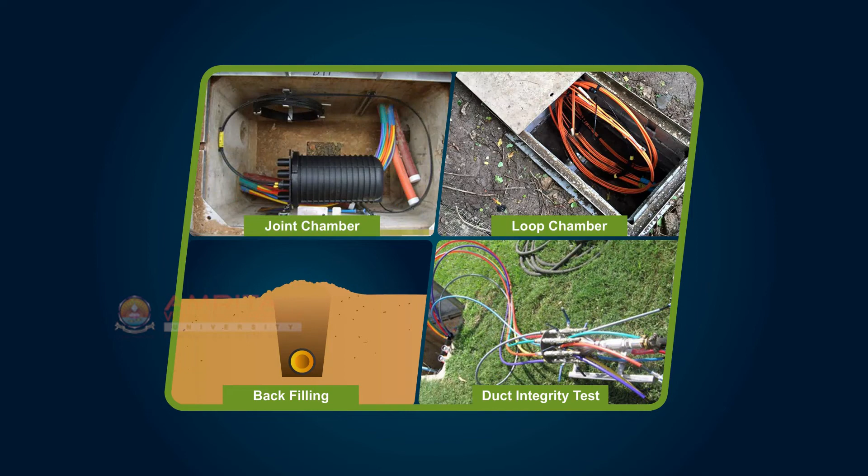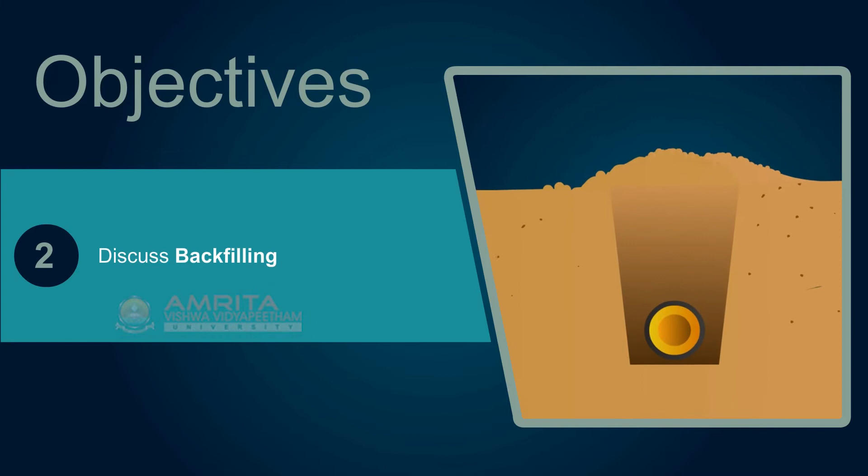Joint chamber, backfilling, and duct integrity test. Installing joint and loop chamber, backfilling, and conducting duct integrity test are the steps involved in installation after laying ducts. In this session, we will discuss these steps in detail. At the end of the session, you will be able to explain about joint chamber and loop chamber, discuss backfilling, and explain about duct integrity test.

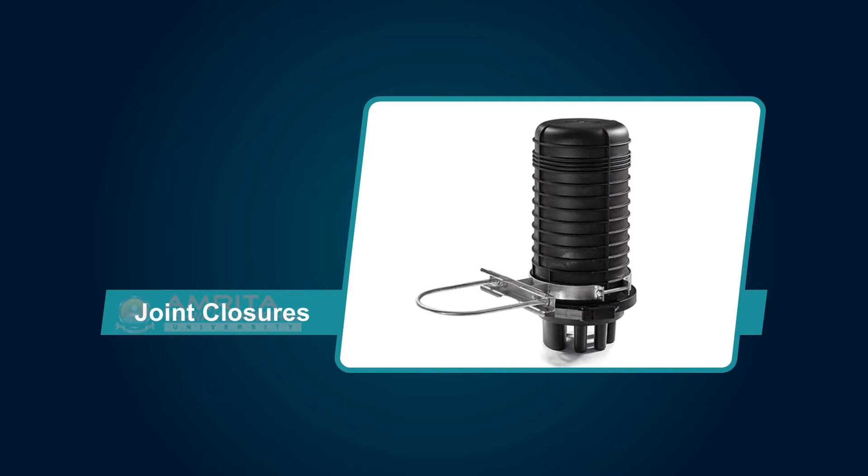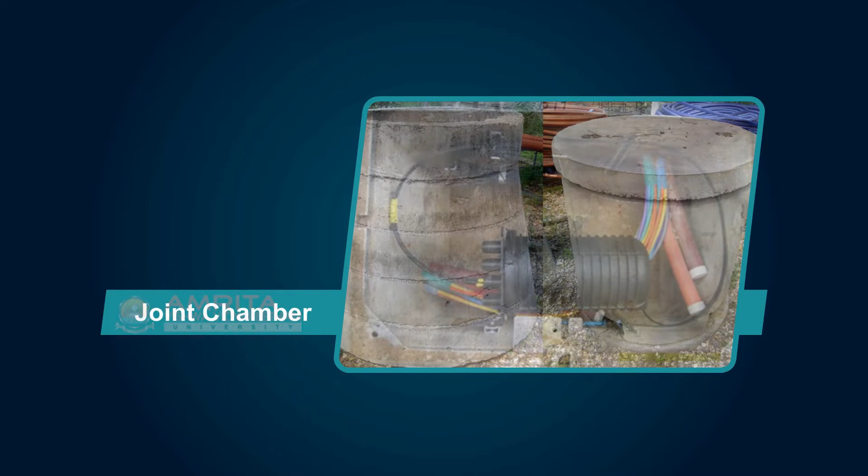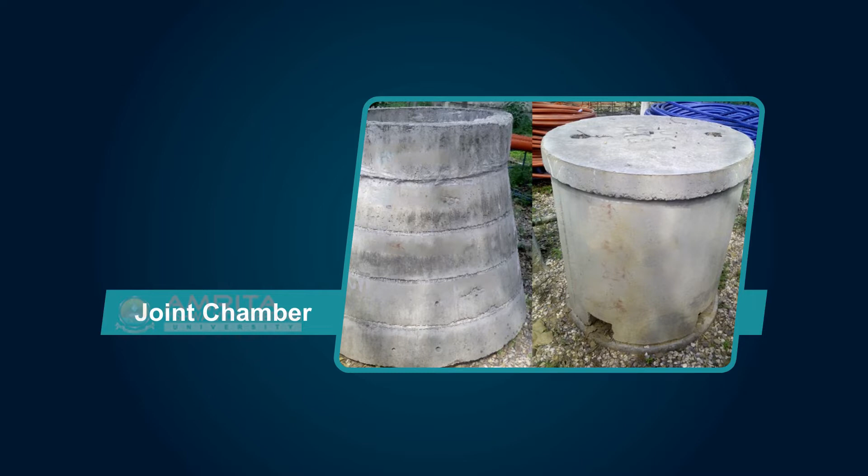Joint closures. As the fiber joints are delicate, they are kept inside a plastic enclosure called joint closure in order to protect the fiber and also to give strength. Joint chamber is the underground chamber in which the joint closure with the splice joint of optical fiber cables is safely kept. They are protected by a chamber cover. Joint chamber is also called manhole or splice chamber.

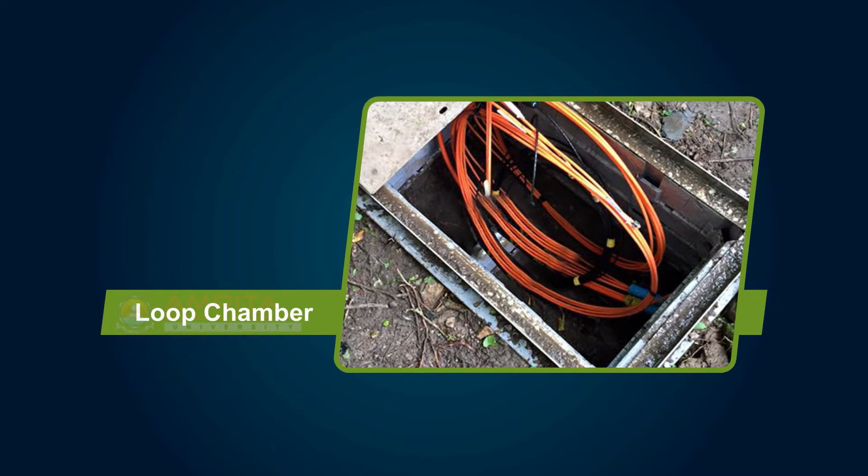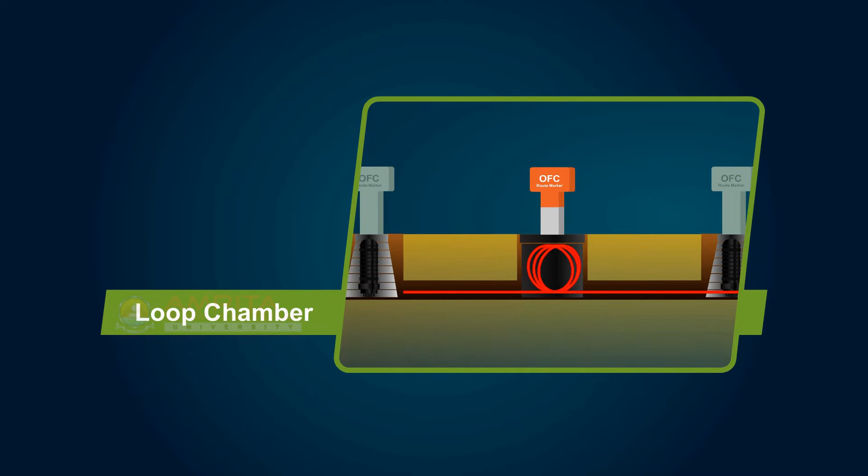Loop chamber. Loop chamber is the chamber in which loops of additional optical fiber cable are kept en route for any servicing or future usage. Loop chamber is also called handhole or pull-through chamber. Joint chambers are placed in intervals as per planning. One loop chamber is kept in between every two joint chambers. The duct entry hole should be sealed in the chamber to prevent entry of water.

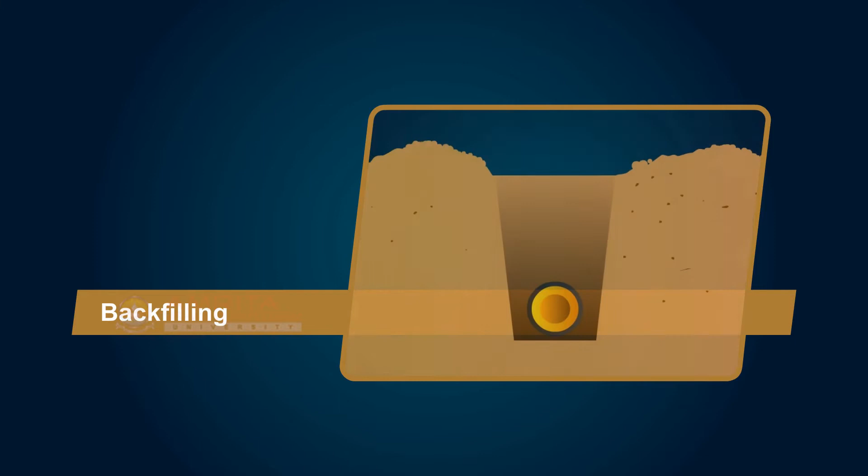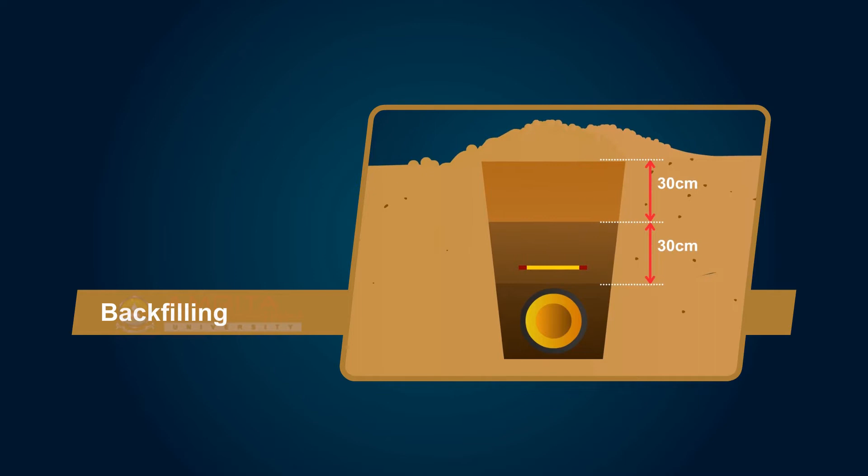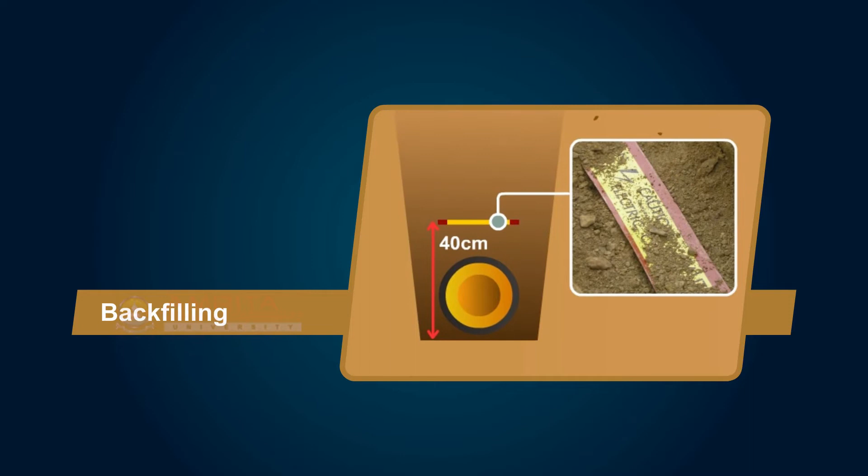Backfilling. Backfilling is the process of filling the trench back with the excavated soil after ducting. It is important that after filling the trench, some more mud is put on top of the trench in a heap as shown here. Filling this heap soil on top is known as crowning. The backfill material shall be placed in the trench in layers of approximately 300 mm with each layer compacted before the next is added. After compacting, the warning tape shall be laid along the whole length of the trench approximately 40 cm to 60 cm below the ground level.

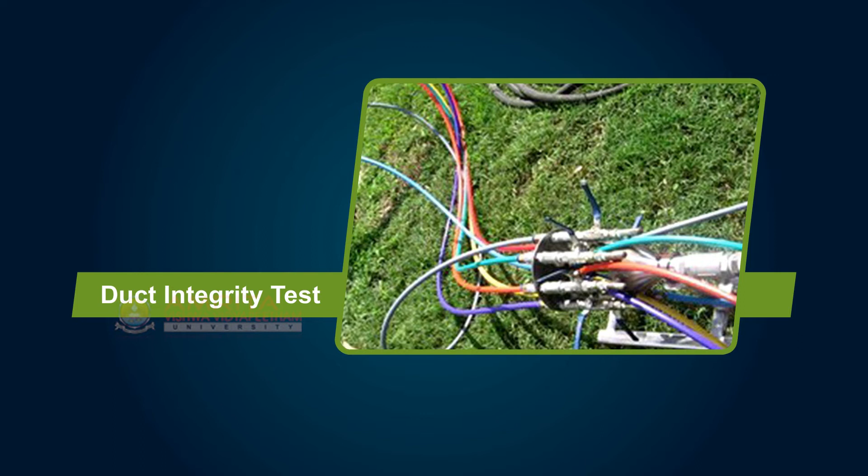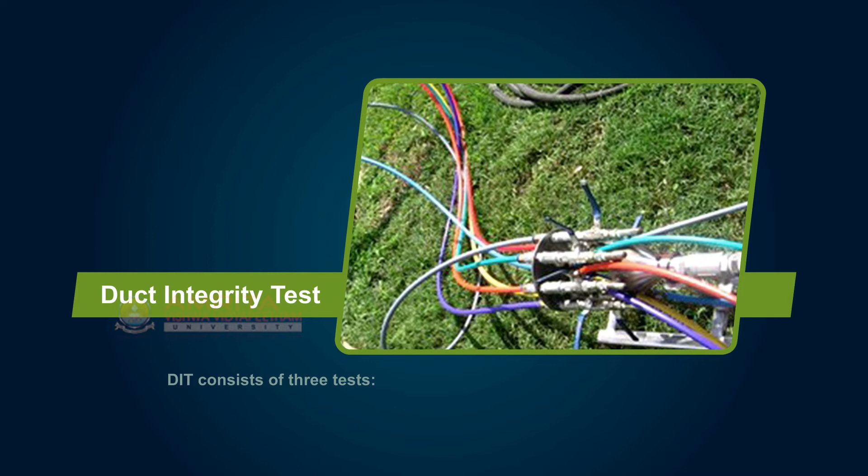Duct integrity test. After backfilling, ducts shall be tested for integrity. This procedure is called duct integrity test or DIT. The duct integrity test ensures that the duct is suitable for cable blowing. It helps in checking the continuity of ducts and blockages. The duct integrity test or DIT consists of three tests: pressure test, sponge test, and shuttle test.

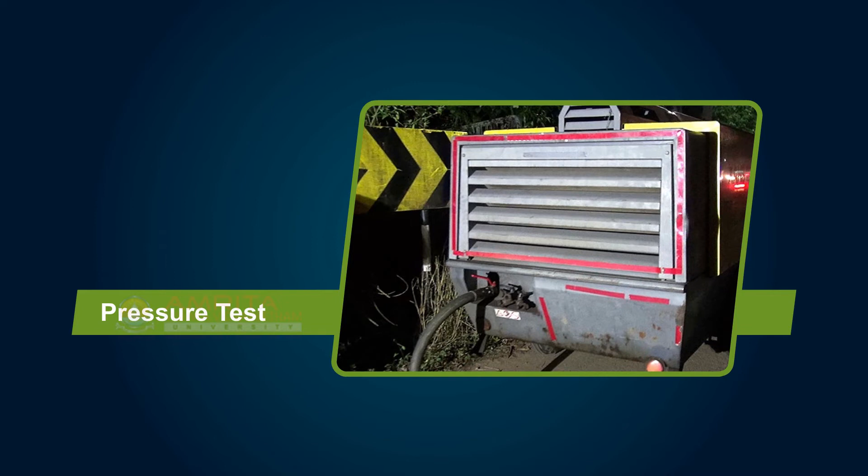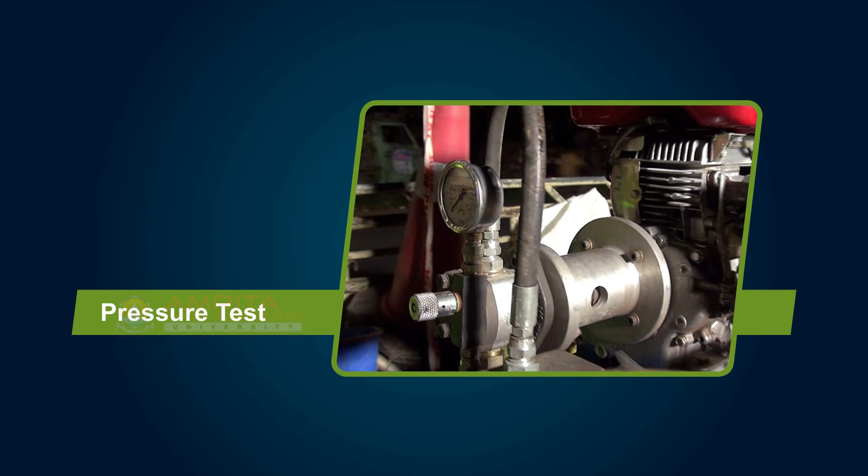In pressure test, air is blown into the duct at a certain pressure. If there is any blockage, breakage, or sharp bend, the pressure of air on the other end will be less. The pressure test is successful if the applied pressure sustains for a fixed time without a major dip. A spontaneous decrease in air pressure shows a failure and that the duct should be examined.

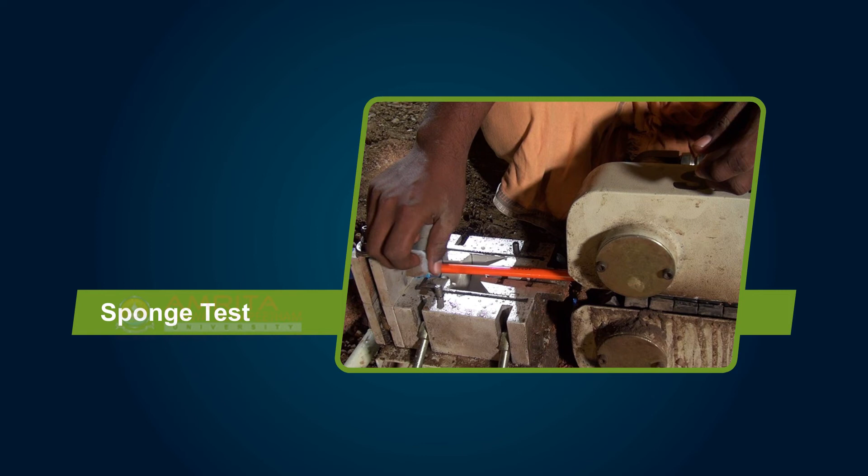In sponge test, sponge is blown into the duct from one end to another. An average time for the sponge to come out at the other end for 1 kilometer is 1 to 1.5 minutes. If it takes a longer time, it shows that there are problems in ducting, and the duct needs to be examined.

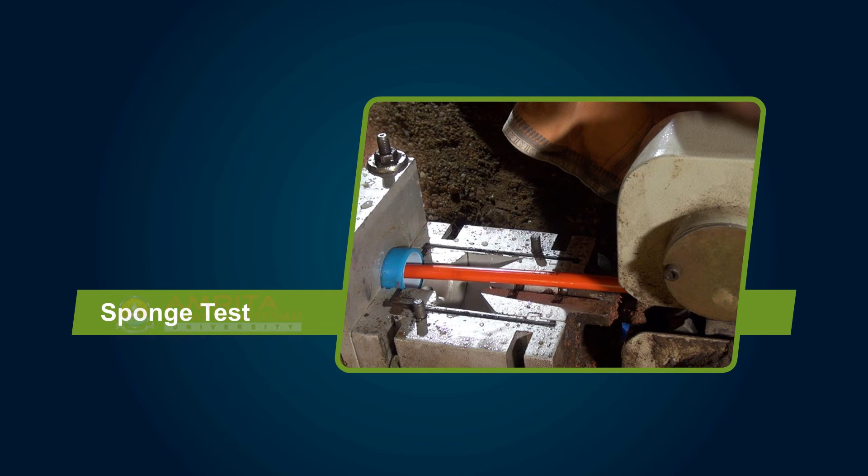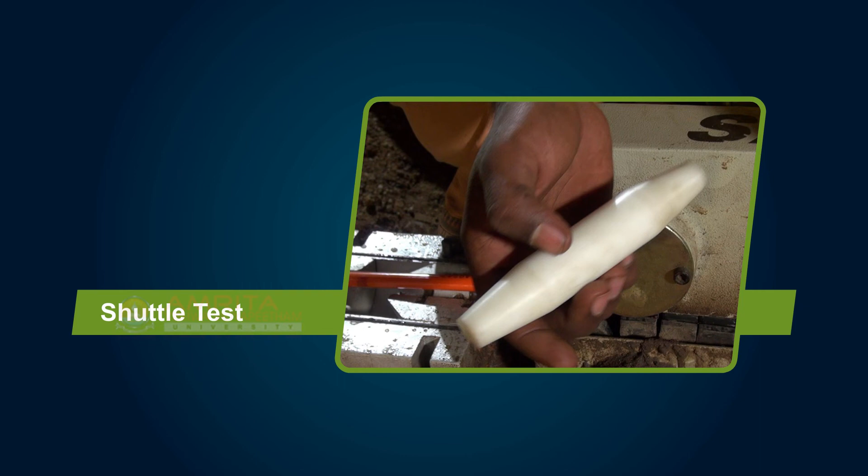In shuttle test, a shuttle is passed through the duct with the help of compressed air. If the shuttle comes out from the other end, then the duct is good for cabling. If the shuttle does not come out from the other end, then the duct is blocked. The blocked location is identified, dug out, and replaced.

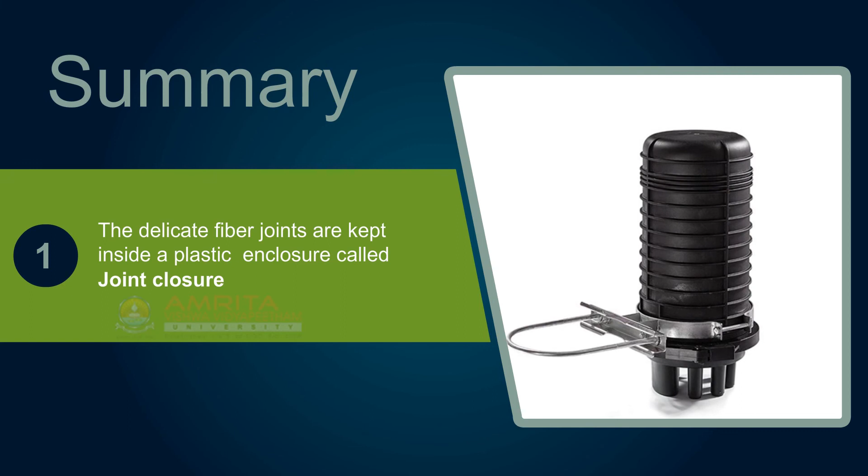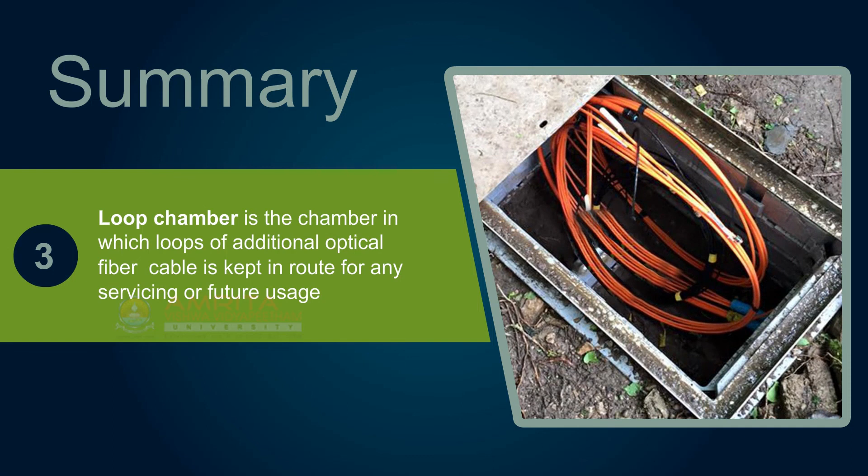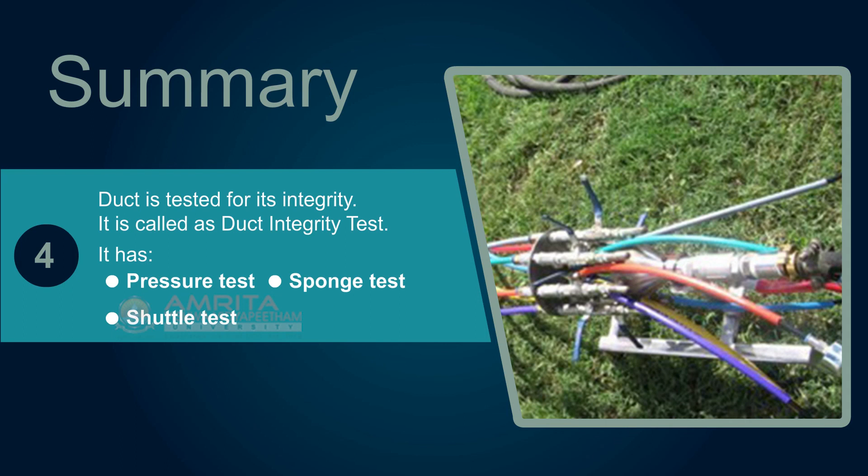With that, we have come to the end of the session. Let's now recollect the key points. The delicate fiber joints are kept inside a plastic enclosure called joint closure. Joint chamber is the underground chamber in which the joint closure is safely kept. Loop chamber is the chamber in which loops of additional optical fiber cable are kept en route for any servicing or future usage. Duct is tested for its integrity. This is called duct integrity test or DIT. The three types of duct integrity tests are pressure test, sponge test, and shuttle test.